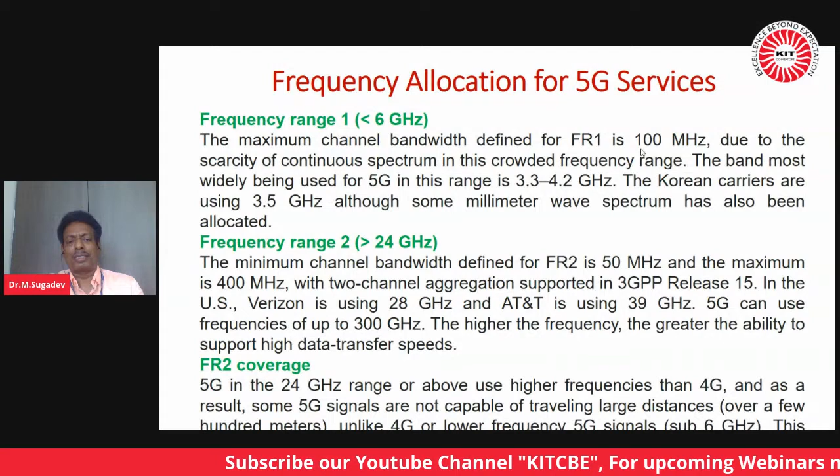And the electromagnetic tool we are going to see today can be used to simulate up to 300 gigahertz, even beyond that it would support. And if you are satisfied with the simulation results, you can go ahead with fabrication as well. Okay. So I have taken microstrip antennas because the sub 6 gigahertz band, some modem applications also fall in the 3.5 gigahertz band. So I'll take that frequency and show you how to design and analyze a microstrip antenna here.

So since mostly we use microwave frequencies for millimeter wave communication, that is 5G communication, which type of antennas are good for 5G applications? Probably the microstrip antenna, because it is more compact, you can easily increase the gain, build arrays, and go ahead with phased arrays where you can do beamforming. That is, you can direct the radiated beam in a specific direction of interest. All this is possible very easily with the microstrip antenna structure.

For high power applications, of course, we can go for the parabolic dish antenna; radars use parabolic dishes and other things. But for compact and portable wireless devices, microstrip antennas are going to play their role in the coming years. Over the past 5 to 10 years, they have invaded almost all wireless devices, and they will definitely continue for another 3 to 5 years. The reason is it's a planar device. It's very convenient to fabricate on the PCB itself; you can simply etch a patch and fabricate your device.

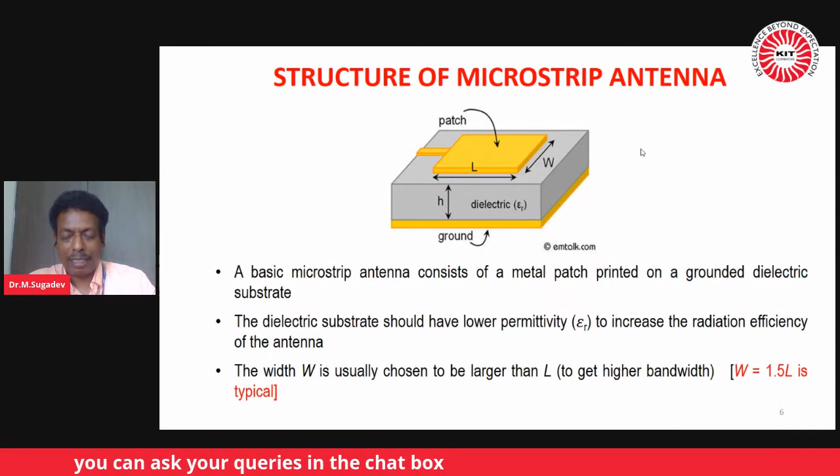And then we slightly extend the copper patch on the top to the edge of the structure so that you'll be able to connect the signal to it. Okay? And this is the fundamental structure of a microstrip antenna. So this structure closely resembles a microstrip transmission line, so it is called a microstrip antenna. Okay.

So what are the patches that we could use on the top conducting layer? As I said, it could be rectangular, square, circular, annular ring, elliptical, triangular, monopole, and so on. Any shape, whatever shape you decide to use, you can make it and try. Okay?

Right. And these are the feeding techniques. So you are making that structure, ground layer, a dielectric substrate, and above that you are making a copper patch. Then how do we connect signal to that? That's called the feeding technique: how to connect our signal that has to be radiated to the designed patch antenna.

But the impedance matching: the rectangular patch will have some impedance, and the source will have 50 ohms. Simply using a straight rectangular feed line of very small thickness will not provide an impedance match, and there could be losses. So the antenna may not perform well. So what people do is they'll try changing the position. The feed may not be at the center. It could be slightly above the center, or below the center. We can find out the exact matching point, and then we can fix it.

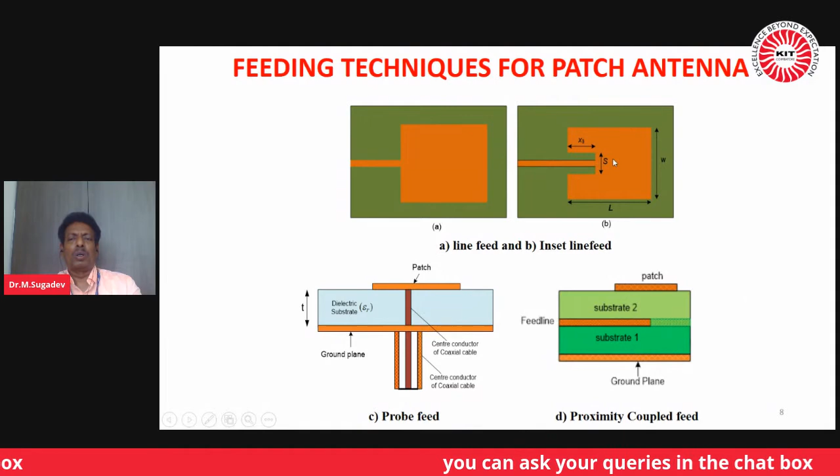Then the other one is proximity coupled, where the feed line is not directly connected to the patch. It is just in proximity, somewhere near to the patch. This structure requires two different substrates, one and two, to sandwich the feed line, so this is also very difficult to fabricate. This could minimize loss, and it could be preferred in some applications, but from a fabrication point of view it is very difficult, and it could increase the cost of your device. So you can go with the basic structure we have seen. Okay.

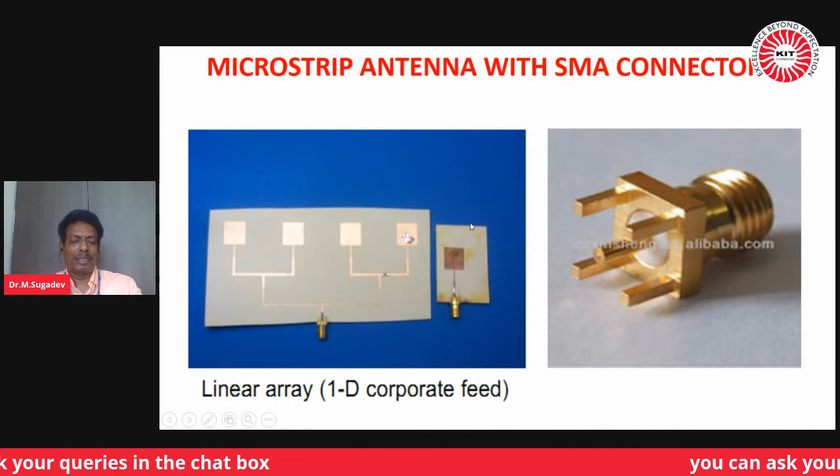And then you could get a microstrip array which will have a higher gain and more directivity. And this could be a required design for 5G mobile applications or the 5G base stations. It could be using an array of microstrip antennas.

So coming to the patch shapes. What I have shown previously used a standard rectangular or circular shape, and there is no limitation on the shape of the conducting patch you put on the top. That's the radiating layer, we used to say. You can try different shapes on the conducting layer, as well as the ground layer. It may not be a fully copper clad ground layer. You can introduce some defect in that. That means you can make some etching in the ground plane or on the top radiating plane, and you can have different shapes as you wish, and you can analyze.

If you could get better performance with your unique shape, that's well and good. So why do people go with these different shapes? To achieve higher gain, to achieve multi-band performance. Normally a rectangular antenna will work for a single frequency, whereas if you try some innovations in it, you can make a single antenna work for different frequencies, 2 frequencies, 3 frequencies, and you can minimize the losses. You can increase the gain, polarization you could change. All this is possible by simply playing around with the shape of the patch and its dimensions. It is quite easy when you become familiar with the electromagnetic tool. Any tool you can use.

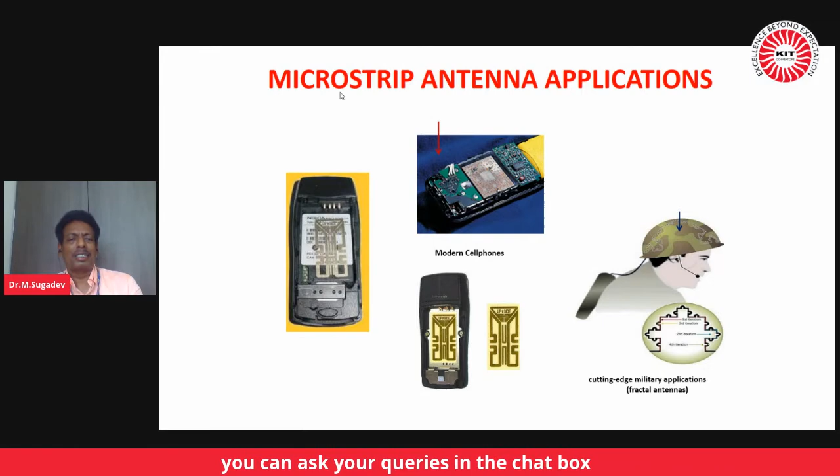This slide shows some of the applications. It is quite convenient for wearable applications. You can make it with some flexible substrate, then use it for wearable applications. All mobile phones will have a microstrip antenna, but they will have a unique shape that the company people would not reveal. All your Wi-Fi modems, Wi-Fi modules, RF modules, Bluetooth modules, in all of these you could see a small patch element that's acting as the antenna.

Okay. So what is the scope of microstrip antennas? It is very compact and very easy to design patches. Beam forming is possible. That means you'll be able to steer the beam in the required direction by employing phase shifters. And you can employ digital signal processing techniques for the phase shifters, and you can go ahead in building smart antennas. Different structures of patch shapes can be studied to achieve multi-band operation, optimized antenna performance, and so on. There's no limit in that.

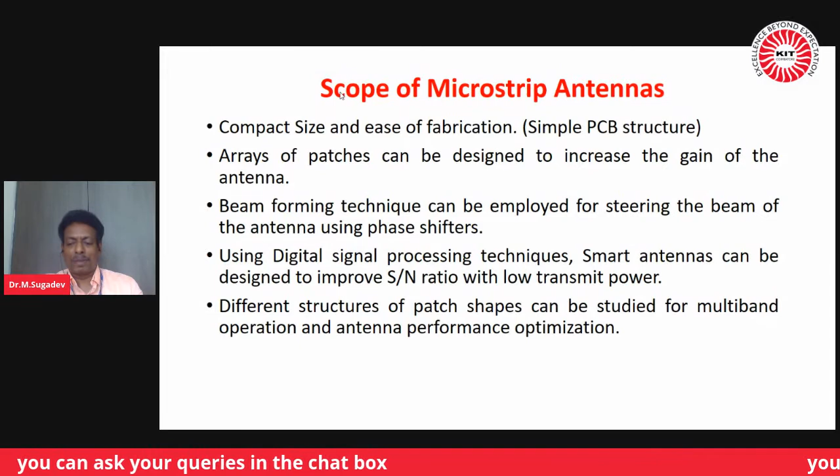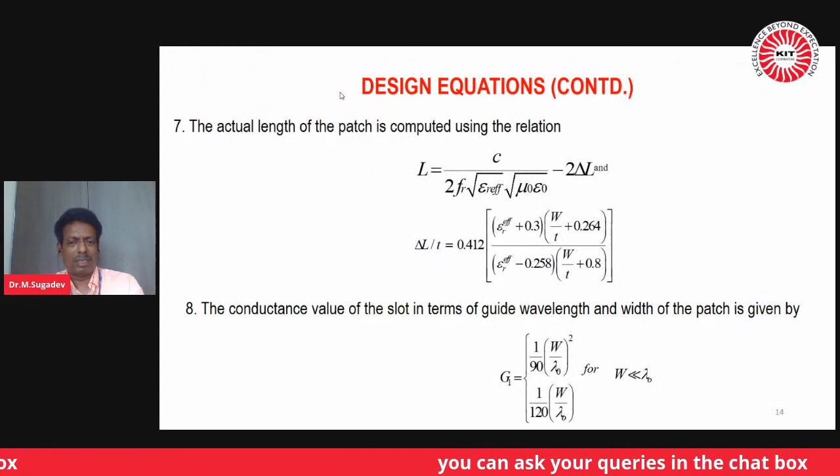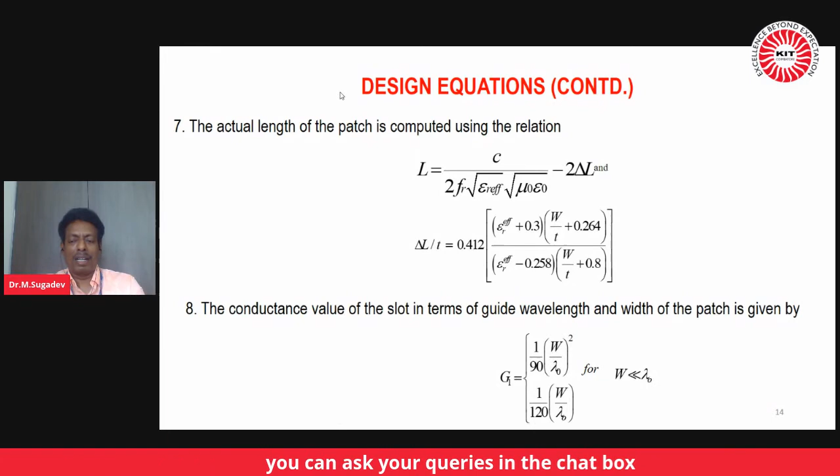I'll tell you how easily you can design an antenna with the online calculators that are available. Actually, I'm not going to use this complex equation. I'll simply use some online antenna calculators available for microstrip, and I got the dimension.

Okay, so now we'll proceed with the design of a 3.5 GHz patch. So whatever it is, 4G, 5G, 3G, as far as antenna design is concerned, we have to see only what is the frequency range for which it has to operate. Then we have to see what is the bandwidth required, because that decides the data rate of your transceivers actually.

So as far as the antenna engineer is concerned, we see what is the frequency range for which they need the application, what's the limitation, the dimension, what should be the maximum size within which we should design the antenna, and then how much power we are going to transmit. Generally for low power, microstrip is well and good till 1 watt. There's no problem with microstrip patch antennas actually.

And then the gain, how much gain is required, type of radiation pattern. This is what we are concerned with, and we need not bother about what is the technology, 5G or 4G, whatever it is. So we'll consider a microstrip antenna that has to work at 3.5 GHz, and let us see how to design and analyze that antenna.

Okay. So once again, I'm showing the structure of the microstrip antenna because this is what we are going to design. And what difference you see here, instead of that inset feed, let us try using a quarter wave transformer. Just a stretch of microstrip line can act as a quarter wave transformer, and this could provide impedance matching in the antenna actually. Other than that, it remains the same.

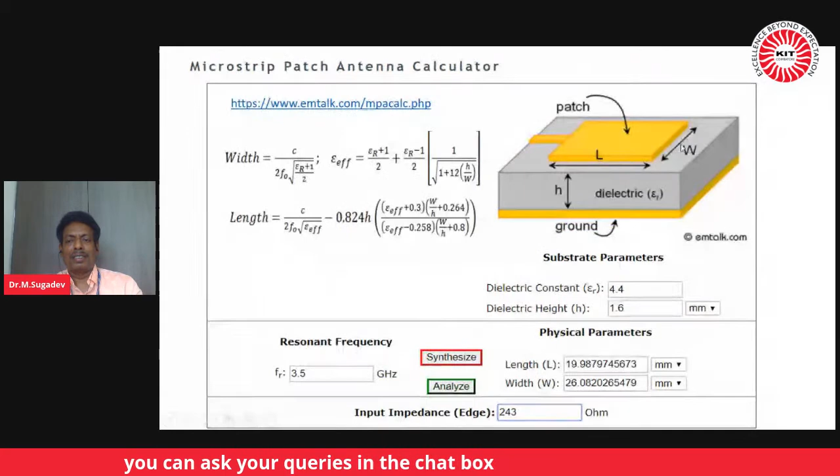And length of the patch we calculated for 3.5 gigahertz. Width, you got it. Then length of the substrate, this we have obtained by adding lambda by 4 on the right side, left side, and top of the patch. So we got the substrate length as well as substrate width, right? I hope it's clear. The substrate length is obtained by adding lambda by 4 onto the length of the patch on top as well as the bottom. That's what we have done. And similarly, width is obtained by adding lambda by 4 to the right and left.

So we got this. It's fairly around 6 centimeters. Your antenna size along with the substrate is around 6.8 centimeters. Feed line width, we have used this microstrip line calculator, and we got around 2.98 mm to get an impedance of 50 ohms. And then feed line length, I have used lambda by 4, but to be more precise, it could vary slightly. But to make it simple, I have simply taken a length of lambda by 4, 21.42 mm.

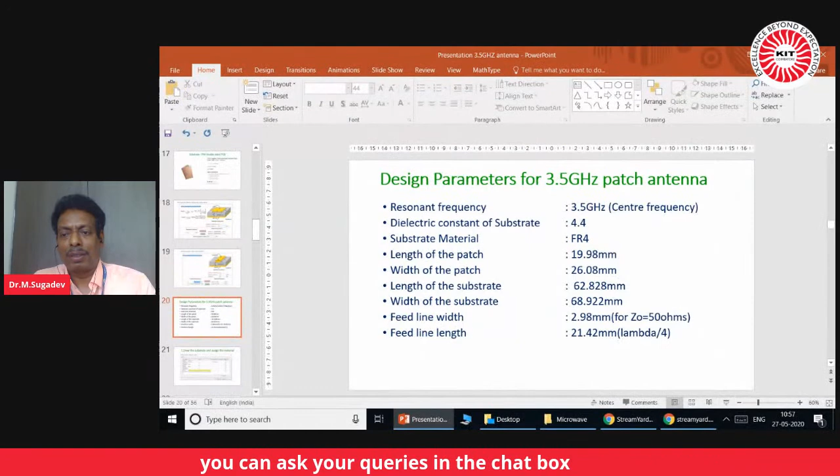Right. Now, before introducing the software, I just want to make sure, any questions if you have, you can please ask. Before going to the software, if you have any doubt, you can ask. Okay, may I proceed? Okay.

Where we got this L and W equation: the standard book for microstrip antenna design is Balanis, Antenna Theory: Analysis and Design. In that, one chapter is dedicated to microstrip antennas. You could find the complete design equations for a rectangular patch and a circular patch. We just take the equations published in that book. Those are standard equations which you can rely upon. Even all the online tools available are based on those equations. They have put the equations for two models, transmission line model and another model. This one is based on the transmission line model, which is more popular and works accurately.

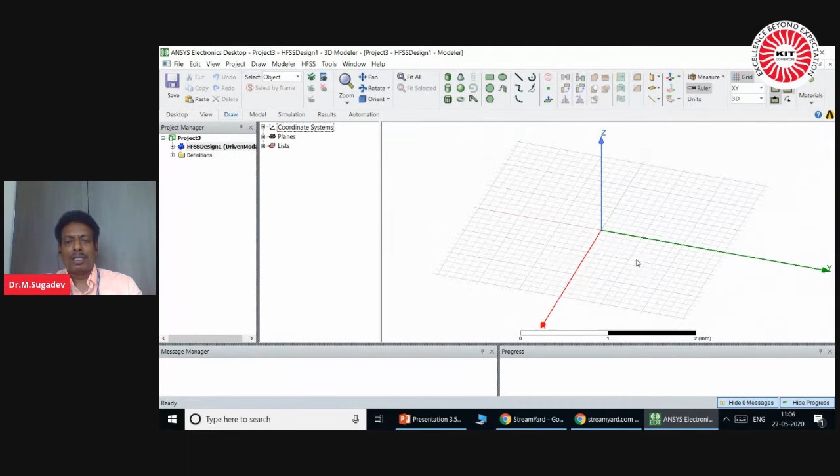So I keep the origin at 0, 0, 0. So with respect to that, I'm going to draw. So the X is the red line and Y is the green line and Z is the height actually. So I'm going to start from 0, 0, 0, and first I'm drawing the substrate. As you know, the length would be 60. You can check here. The length would be 62 and width would be 68. Okay. So it is a box actually. So it has some finite thickness. So we have to select a box, draw a box.

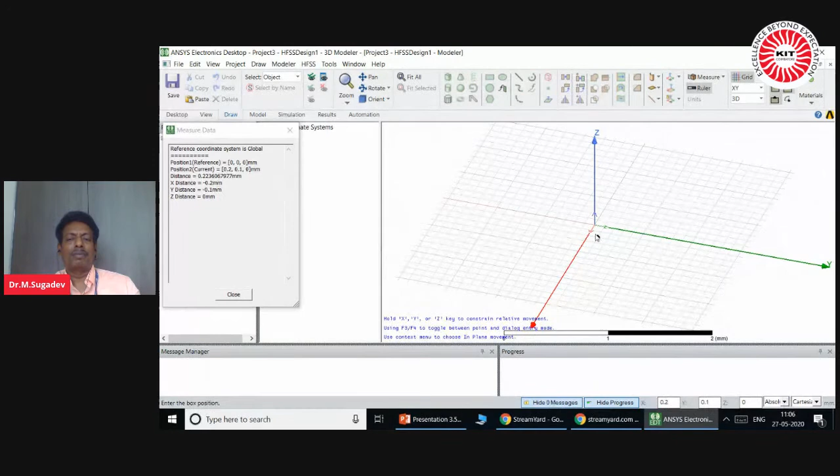I'm going to draw a box. You need not draw at the right position. You draw somewhere in the workspace. Then you can enter the dimension for that box, and then it will go and fit into that exact position actually. So I'm not drawing here with respect to the coordinate. Just randomly I draw a box here. Okay. So when you create a box in the workspace, you could see the object is created in this model window actually. And initially it is vacuum material. We have to change it.

So double click on that. You can right click, properties. You can edit the material, or the other way, you simply click on the box. You give some name actually. So first we are going to create the substrate, right? It's not vacuum. I have to select the material. So I'm just editing it to select the material. You have a list of materials, various materials that could be used. Rogers RT Duroid, what I told, is the Rogers material. Then you also have Arlon in this.

Any material you can try out, but when you fabricate, what is available to you, you have to check. So I simply type FR4 and you could see FR4 epoxy being selected. If you want to know the property, once again, I'll just right click on this, edit. I'll show the property. You could see the property in this. FR4 epoxy, 4.4 relative permittivity, and that's what we are using in our design equations actually.

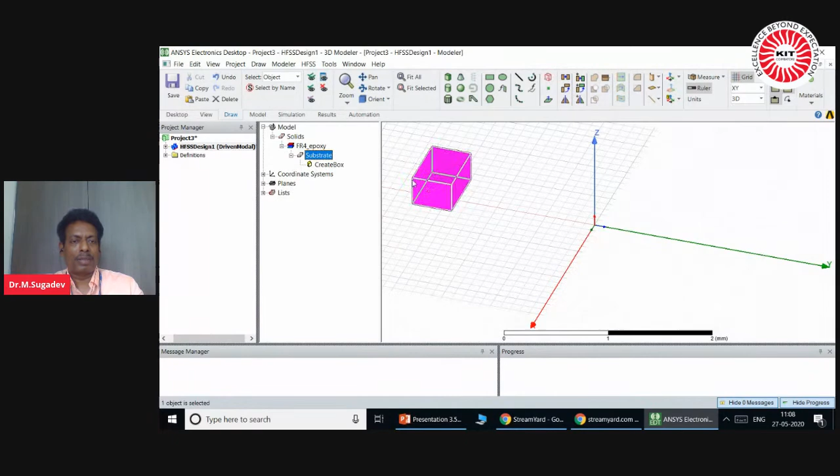Okay, so we have selected it, and if you want to use some color, you can choose. This will help to visualize the object actually. Substrate can be any color you want. So you double click on this box one, what you have created, and assign a name and choose a material. And then if you want, you can put some color over it. And then you click okay. Now you could see that object changed to substrate actually. Still the dimension we have not entered. Then click on the create box to enter the dimension.

As I said, we are going to start at 0, 0, 0 position. At the origin, I am starting. So I want to keep the surface at z equal to 0. So the x size is, I will just look into my worksheet. So substrate position is 0, 0, 0. X size is 68 point. This is what we have calculated. This is the width and length plus lambda by 2, lambda by 4 we have added, right? I hope that's clear.

Then the y dimension: x is 68 and y is 62. Just enter this value, 62.828. Look at this. And z size is the thickness. I'll give minus 1.6. We need a thickness of 1.6. Why I give minus 1.6 is that I want to keep the radiating surface at z equal to 0, right? So I'm just drawing the substrate down in the minus z axis. So the substrate thickness will go down. The top of the substrate will be at z equal to 0, and the bottom of the substrate will be at z equal to minus 1.6. That's the reason I have done that.

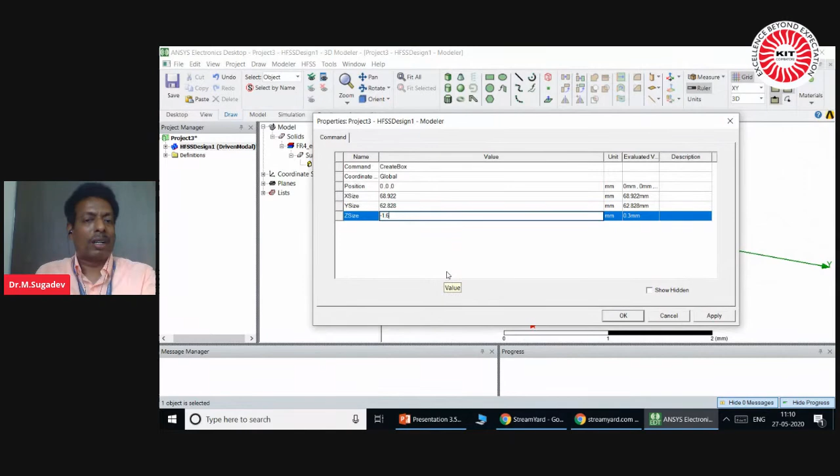And we got this value of width and length of the substrate by adding lambda by 4 on the left and right side of the patch and top and bottom of that. That gives the substrate length and width.

Okay. So I apply this, and you could see once you enter the dimension in this create box under the substrate object, it goes to its position according to the coordinate. It goes and fits itself. So you can zoom it, so now you have created your substrate. Okay, right. So the first job is over.

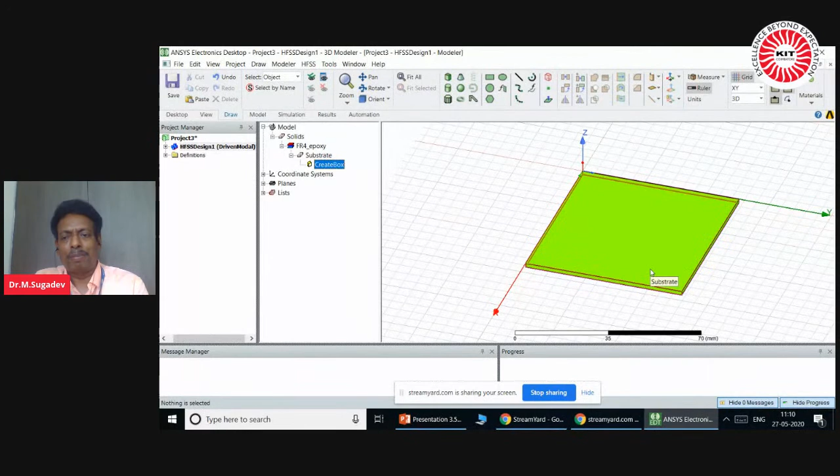We did the substrate, and then let us draw the ground plane. So the PCB, all the microstrip structures will have a copper ground at the bottom. So we'll make a copper patch at the bottom. This is not the radiating one; it's a ground layer, copper ground layer.

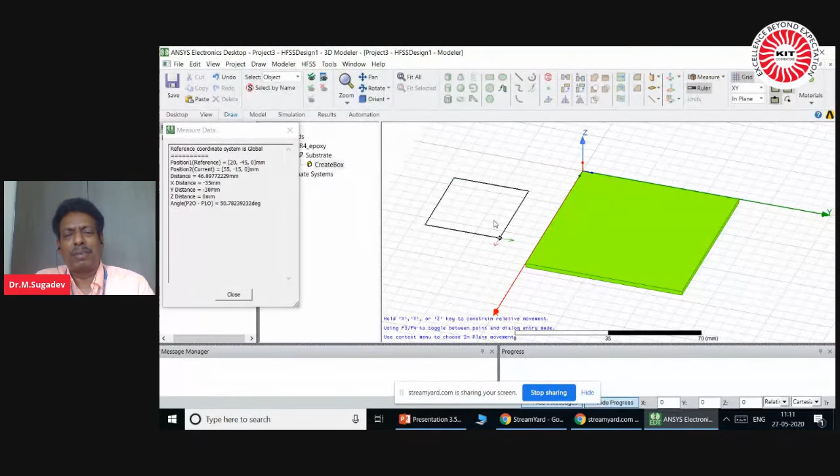So for this, I'm not choosing box. I'm choosing a sheet because the copper thickness will be negligible. That's the reason why I have chosen a sheet. So it doesn't have any thickness. An infinitesimally small layer of copper at the bottom that's going to act as the ground layer. So I have chosen a rectangle for the ground layer, right?

Okay, once you draw a rectangle, somewhere you can draw in the workspace. Again, you could see an object named sheet here and rectangle 1 because its shape is rectangle. So you can double click on the rectangle here and then give the name. It is ground. If you assign a proper name, it will avoid ambiguity and confusion.

So the ground layer is a copper layer. This is not material. I'm just assigning some color just for my observation. In the structure, if you assign different colors, you'll be able to visualize it. This is not the material. So we have given the name by double clicking on the rectangle, ground, and color I have chosen. If you want to change the transparency also, you can change it. Give okay.

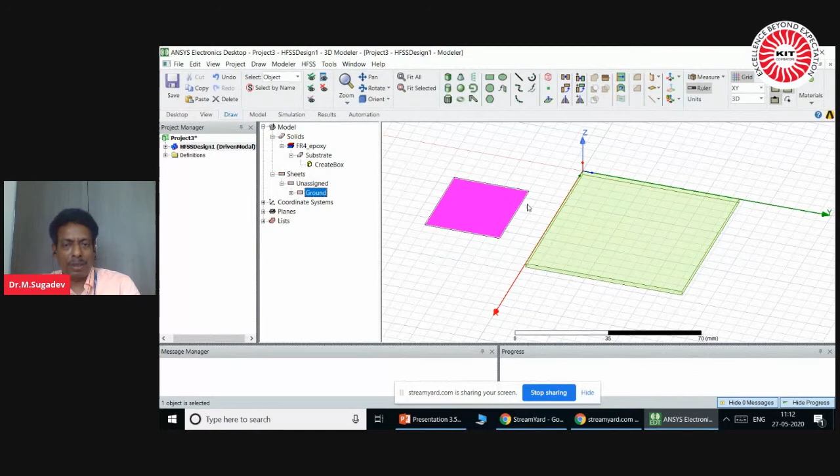So now we have to give the dimension. So what's the dimension of the ground sheet? The ground sheet has 0 thickness, z equal to 0. So its dimension would be the same as your substrate. Only the position is different. You have to draw it at the bottom. The origin is different. So I expand this ground. I click on create rectangle.

Now I have to enter the position. So x position is 0, y position is 0, but z equal to minus 1.6. Position is 0, comma, 0, comma, minus 1.6. So I want the ground plane to be at the bottom of the substrate, right? The bottom of the substrate is at z equal to minus 1.6. That's the reason why I'm drawing the ground plane right from z equal to minus 1.6, so it will stick to the bottom of the substrate.

And x size is same as your substrate, right? It should stick to the substrate. So x size is same as that, and y size is also same as the substrate. So it is 62.828. Okay. So now we have finished drawing the ground layer also.

You can see it here, but you click on this ground, and there are some tools to rotate. You click on the tool to rotate it, and you can see at the bottom you have this ground plane. Let us see what color we have chosen. We have given this color. It's okay, no problem. If you click on this create rectangle, then you could see that.

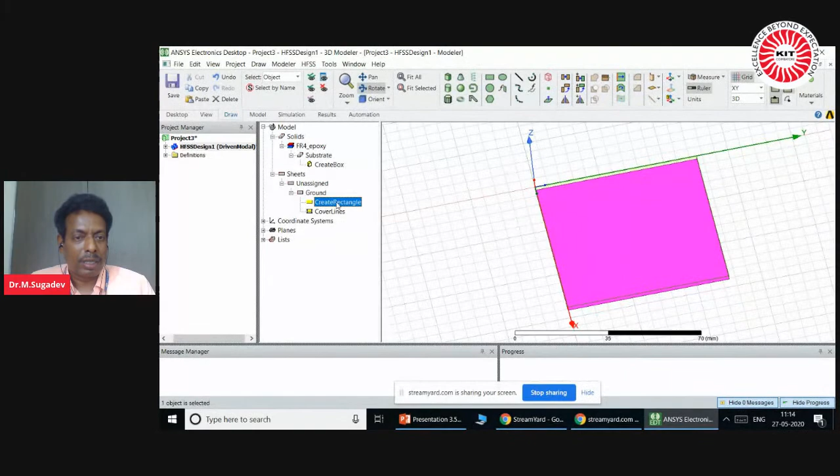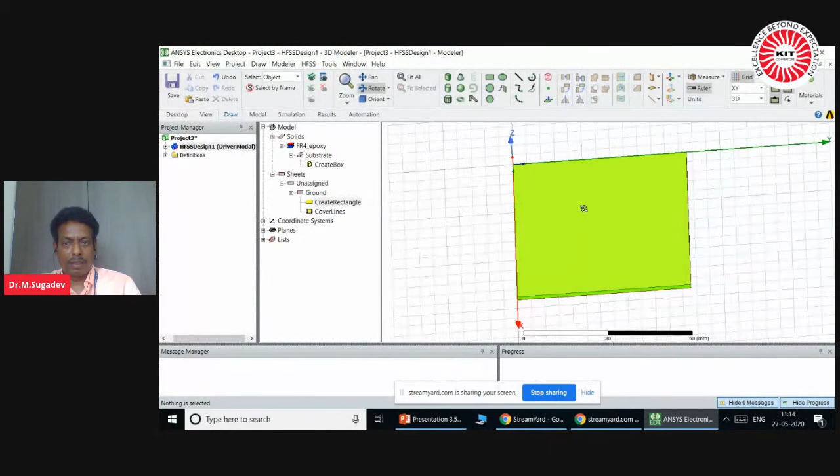So at the bottom of the substrate, we have created a layer of copper. That's a sheet, a rectangular sheet, which will act as the ground plane. Okay, is that clear? Right. It is rectangular only; it's just the view. You can rotate it if you use this tool. Pan tool is used for moving this, and with your mouse you can zoom in or zoom out.

Okay. Then what's next? Now we have to draw the rectangular patch, right? So in the PPT, you could see the steps. We are first drawing the substrate and assigning the material, and the next step is entering the dimension. We got the substrate, and then after that, we draw the copper patch behind this. So we choose rectangle, enter the dimension.

Okay, after drawing this, when you draw a copper layer, you should assign the material. For the substrate you have assigned a dielectric material with 4.4 permittivity, but for this ground layer, you should assign what material it is.

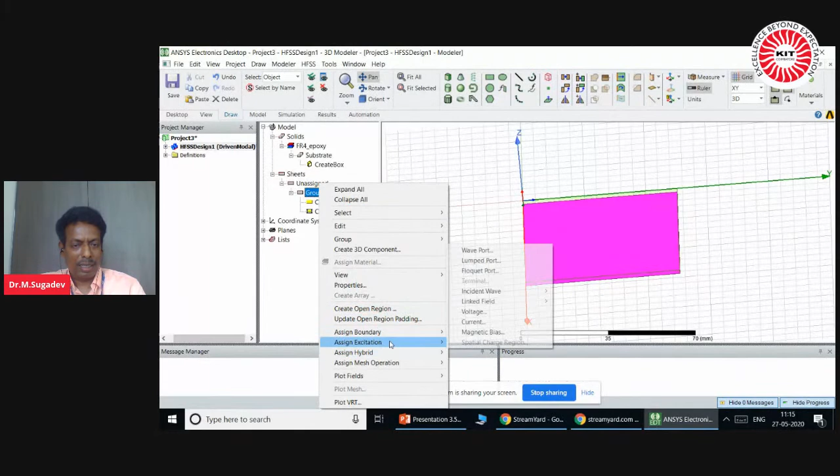For a sheet, you should tell. So how to assign that? You click on ground, right click on it, then I'm assigning what material it is. You could see assign boundary. So I'll simply tell it is perfect. It's a perfect electrical conductor. I'm not telling it is copper or aluminum or gold, whatever it is. Simply I say it is a perfect electric conductor. That's what you can do for all conducting layers.

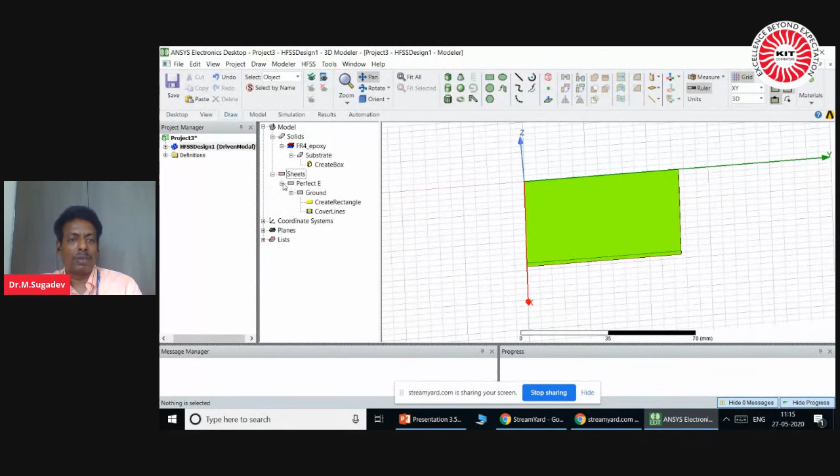So the ground layer is a conducting layer, so you can assign perfect E. Once you assign that, you could see we have assigned that material as a perfect E. Then the next one is the patch. The third one is drawing the patch. You could see here, we got the dimension of this, and the position. As I said, the substrate should have lambda by 4 gap on all the sides. In the feed direction it could be greater than that, but right now I have chosen lambda by 4 surrounding all this, right?

So with that, I should find out the position, where to start drawing this rectangular patch. It should be lambda by 4 away from this x axis and lambda by 4 away from this y axis. That will be the starting point of this patch. Then from that point, you can give the length and width and create this structure. So there's a little bit of calculation you should know. You know the origin, and you know the gap from the edge, which should be lambda by 4. I said lambda by 4 is 21.42. So from here, x is 21.42, y is 21.42.

That's the starting point of the patch, and z equal to 0 because the top layer of the substrate lies on z equal to 0. So that's our position. We start from here, and the x length would be the width, and the y direction would be the length. We have to enter that, and that will give us our rectangular patch. So I'll go to the software now. The top layer is also a copper layer, so I'll again use a sheet here, a rectangle.

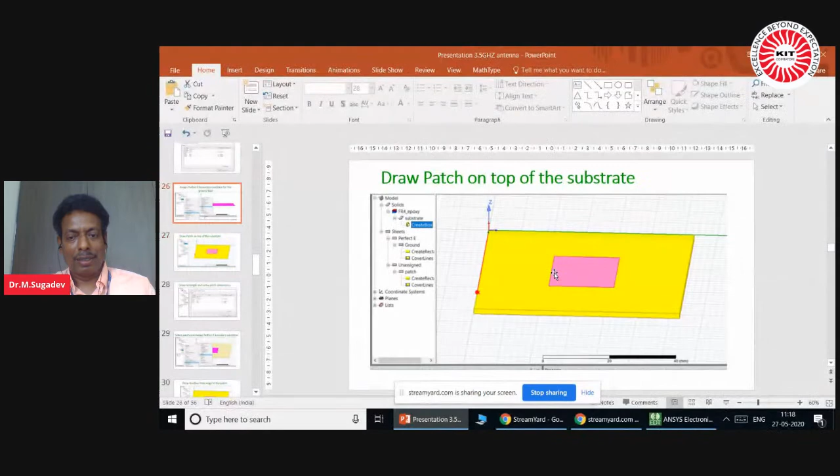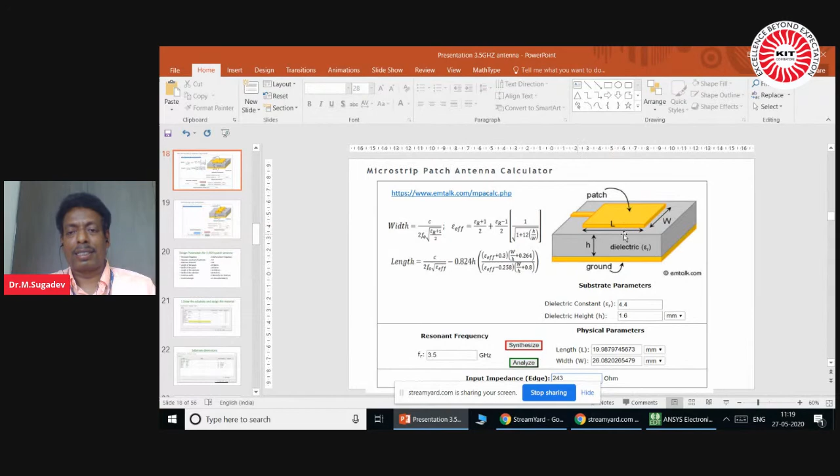Then x size. Now what is x? You can give the dimension of the patch. You could once again look at this. The length of the patch, according to our coordinate, L is the y dimension and width is the x dimension, because we are following a unique xyz coordinate. So now I will go here and enter this value. This value is already calculated.

For the patch, x dimension is 26.082 and L is 19.988. W will always be slightly greater than L. In fact, W by L should be less than 2. We should see that. So this is the length and width we calculated using that emtalk website Microstrip patch dimension calculator. And Y size, we have given that.

Sorry, I had to give them separately. So X is 26.082 and Y is 19.988. The more precisely you give the values, the more resemblance there will be between designed and simulated values. So I apply this value. Now you could see the patch sitting in its respective location with respect to that coordinate, right? So we have finished the patch. Now I'll go with the rectangular feed line. Now we have to draw the feed line.

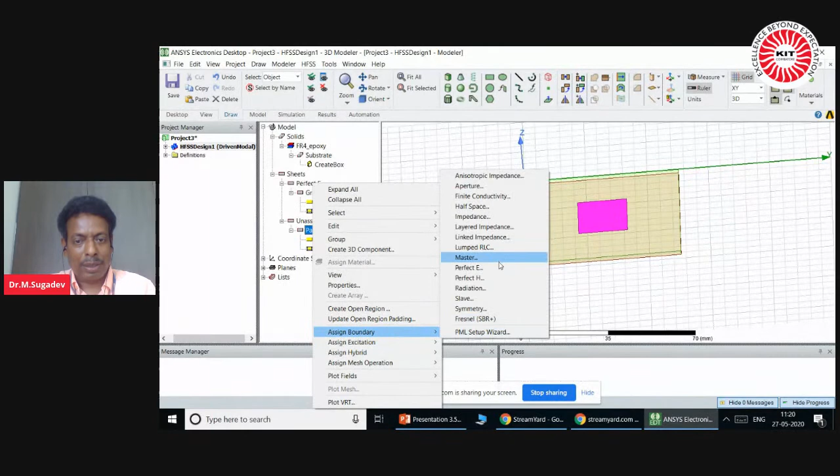One more thing, for the patch also we have to assign that boundary. It is also a copper layer, right? So assign boundary, you can give perfect E. So it becomes perfect E now. It's a conductor, we are telling it is conductor. Then draw the feed line. Now we have to draw the feed line. I'll show this. Okay, another feed line is a rectangle, right?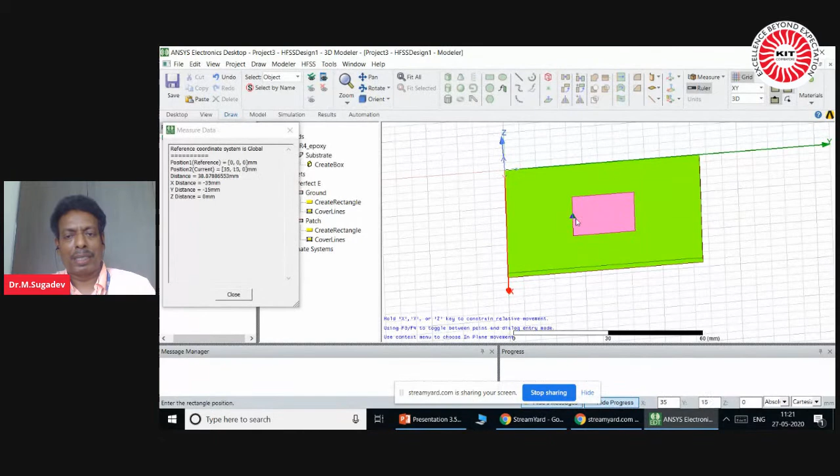As I told, I'm going to use that quarter wave transformer, right? So two different lines will be drawn here. One will be slightly wider and the other line will be shorter because that will give you a better performance. So I'll draw first feed line 1. We have calculated that feed line 1 is going to be at the edge of this. So its width, we got it as 2.98, right? Okay, that we are going to draw. Unassigned rectangle. So this is feed line 1.

So I'll make the same patch color so that it's the same copper patch. I've drawn this. Now we have to enter the dimension for this feed line 1. So position is, I'm starting from the edge. I already calculated 32.93, comma 0, comma 0. Okay, so this is the starting point of the feed line, and its width is 2.98, which we calculated using that microstrip line calculator, and y size is the length.

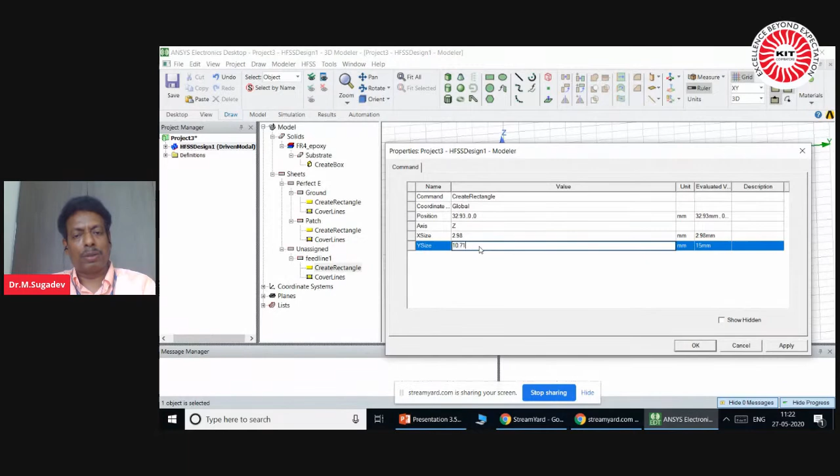I'm not drawing a single rectangular feed for the length 21.42. You can try it actually. You can first try with a single strip, you can put y size equal to 21.42. So yes, single strip will go and join with the patch and you can see what's the result. Time is running short, so I'll go with that quarter wave design directly. So 10.71 I've drawn, apply. Okay. So I have made one feed here, part of this.

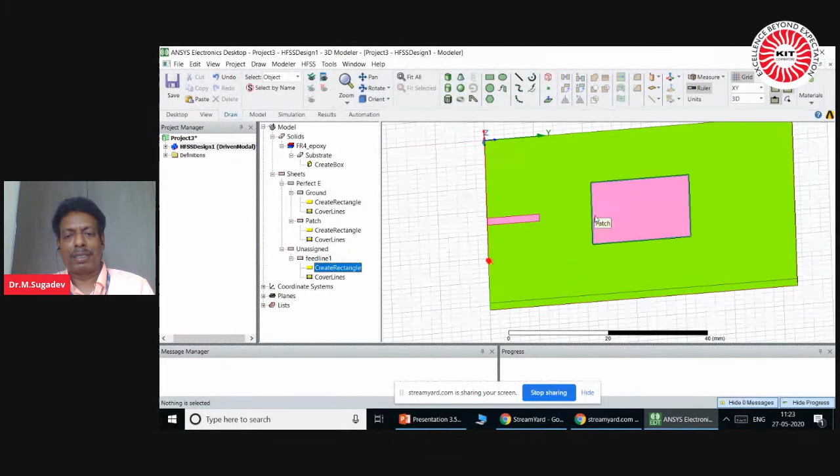So the next line, I'm going to make it narrower because it's going to be a quarter wavelength transformer. It's a thinner line, that's all. Instead of having uniform width from the edge to the patch, I'm going to use a smaller one that provides better results. I'll show you in the results actually. Okay, this is joined now. And then another feed line we have to draw. So again, we take a rectangular thing.

Feed line 1 we have done, it is not assigned, so you can go to assign boundary. This is important because we are telling what material it is. It's a conductor, we should tell, then only the software can analyze exactly. Then another rectangle we have drawn. Patch is over, ground is over, feed line 1 is over. I'll make this as feed line 2. So I'll use the same color because all are copper patches. Apply, okay. Then we should give the dimension for this.

So the remaining length we are drawing. So starting point is now moved, 33.716. It's a position actually, 21.42, 0. This is the starting point, and the x dimension is, see now its thickness is less. The previous one is 2.98, and this one I'm reducing the thickness for impedance matching actually. And the y size is minus 10.71. So why y size minus, I'll tell.

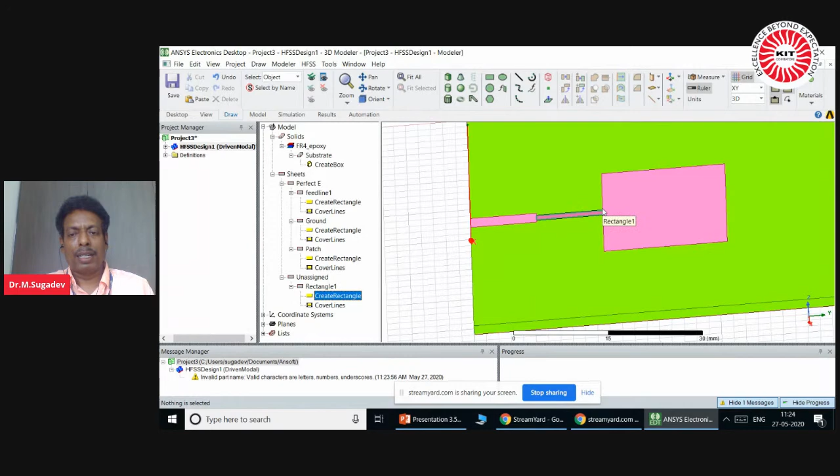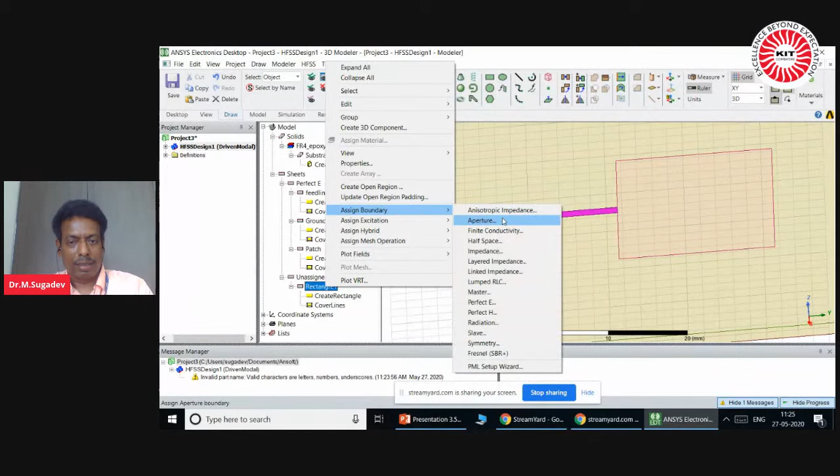Okay. So the starting position is here at the meeting point of this feed line 2 and the patch, and then I give the x dimension and then this y dimension. So since we are drawing in the reverse direction, the y is negative. If you give y as positive, it will go this side, right? So that's the reason why we made y as minus 10.71, so that that line will come back in the reverse direction. So now we have made the feed, and again you assign this rectangle as a perfect E material. So all have been declared as copper. That's a perfect conducting material.

The next thing is we have drawn 3 different objects, right? Even though they are touching one another as per the dimension, they are physically independent now according to the software tool. So we have to merge them. That's called uniting. We have to unite all the 3 segments, and then only the software will consider the 3 objects as a single entity. We have to join the feed line 1, feed line 2.

I have not named it, sorry. I'll once again make it feed line 2. If you name it, actually you can avoid ambiguity. You can easily go to that object which you want to edit, and I think it is not accepting any space in the name, so you should see that. Okay, so easily you can go and edit that particular component if you give the right name actually.

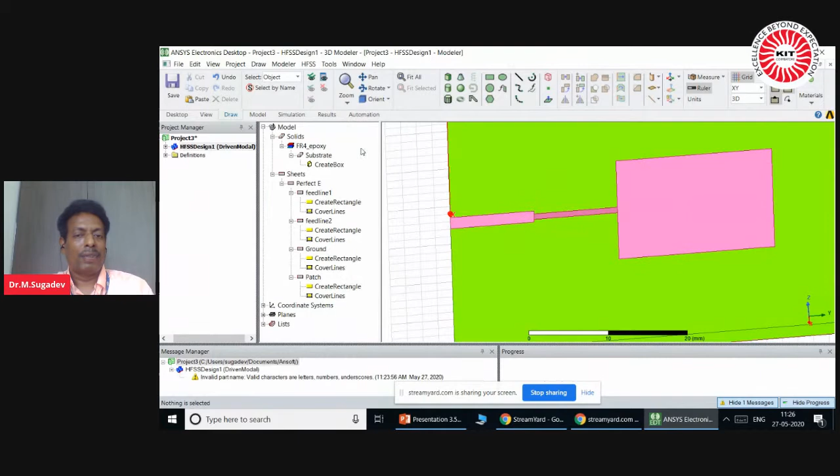So we have drawn it, and we have declared all of them perfectly, right? That the feed line 1, 2, ground, patch, all are copper patches. Then what do you do? Okay. As I said, still they are independent objects as per the software, so you have to merge them together. For that, they have given the option. You select what objects you convert to a single object, feed line 1, 2, and the patch, right? It's a single layer, we just etched it out. So we want to combine these 3, right?

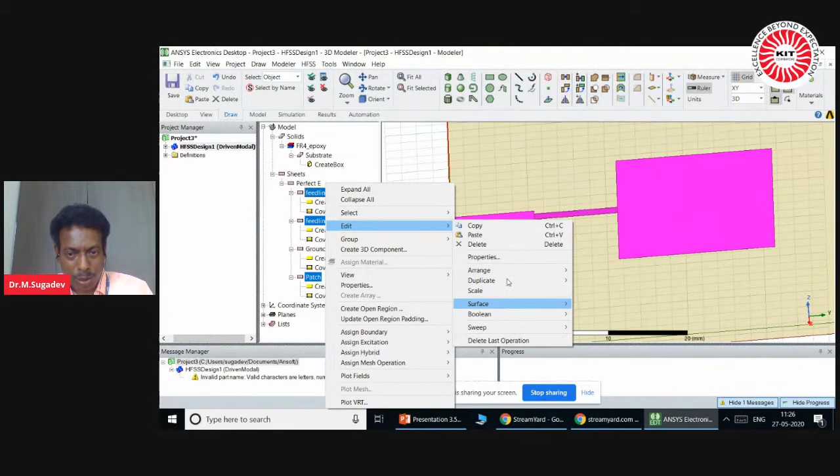So select the elements which you want to join, then right click and you select edit, and then here you could find the boolean. You can add or subtract. If you want to make a slot, we use the subtract option actually. Now we want to join, so select this unite option. So once you do this, you could see there are no boundary lines in this object. Earlier you could see small boundary lines, but now there is no line. It's a single object now. Okay, right.

Okay, our design is over. So we have created the microstrip structure in the software tool, right? It won't be difficult. If you just do 1 or 2 designs, it will become very convenient. Okay, next, you see after uniting, you could see all in this. Only if you expand the unite option, you could see. So all this have been combined. That's what it means actually. Whatever changes we make in the geometry, that reflects in this object window actually.

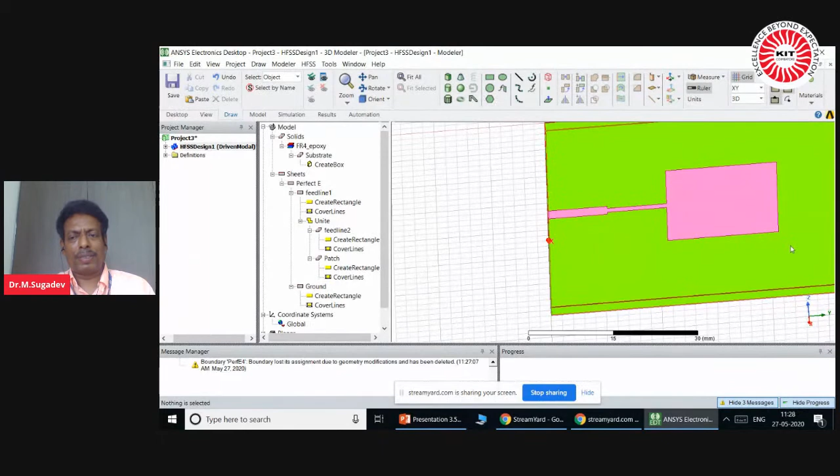Okay, right. The next thing we have to do is port. Someone asked what kind of port you have to use. So as far as the geometry, we have created our design as per the dimensions. It's over. But from the software point of view, we need to declare the port actually. I'll just open this and rotate. I'll change the direction here. Port is nothing but I want to tell the software in which cross-sectional area the software is going to excite our structure. You are going to connect the source, right? So the software should be told in which cross-sectional area the source will be excited into the structure. That is done by defining the port actually.

So it is not a part of the geometry. It is required only for the software tool. As for the geometry, the antenna is over. We have done it, but it is required only for the software actually. So that determines the area in which the field will be applied, the excitation will be applied into the structure, and then it will analyze the radiation pattern and other parameters as well. Okay, so to do this, we just have to tell the area. We have to draw a rectangle. That's a cross-sectional area in which the feed signal will be applied into the structure. So simply we are going to draw a rectangular sheet, nothing else.

But this time we have to draw it covering from the ground to top. We have to draw just next to that structure actually. So since we are going to draw a rectangular sheet, I change to the ZX plane actually, right? It's going to be vertical, right? Now this sheet is flat. The patch and all is flat in the XY plane, and this rectangle is going to lie on the edge of the substrate, right? So its axis is different, right? So I change this to ZX axis, right? Now you can draw this.

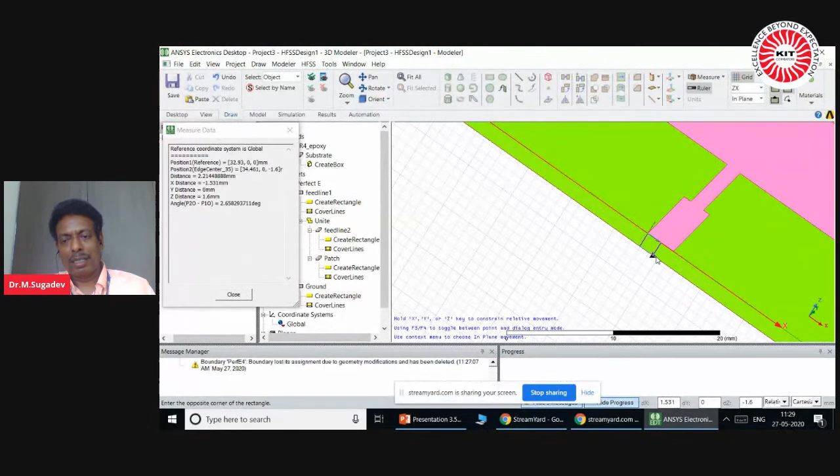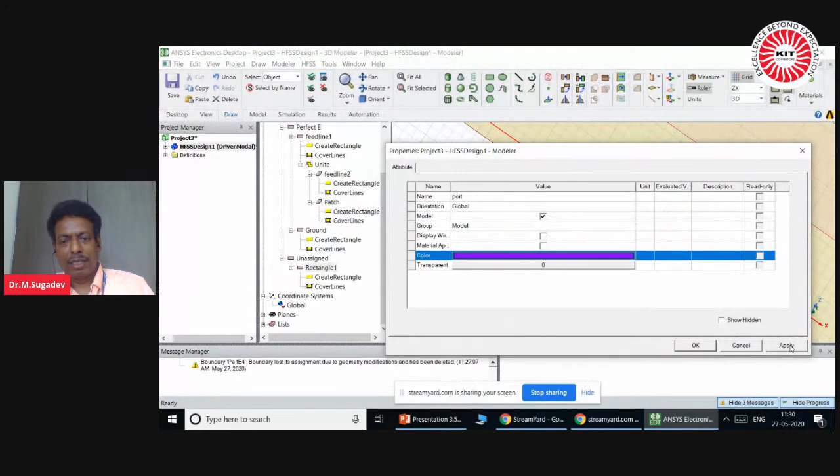As you look at it, I'm just drawing a simple rectangle actually. Anywhere you could draw, no problem. I'll give the right dimension. Now you created another, I think this is port actually. So it is not a part of the structure, it's just for the software. I just name it port and I give some other color. Okay, then apply. This is just a rectangle we have drawn, and then we've named it as port, and let us give the dimension. So it should exactly lie between the top and bottom of the substrate, right? So we have to give the right dimension. So the position of the port is X, draw rectangle.

Okay, so the port position is X is 32.93 and 0, 0. We start at the top edge of that feed line. We start here actually. Here we are starting. This is a position I'm entering here. Sorry, x is 32.93, y is 0, and z is also 0. It is on that plane.

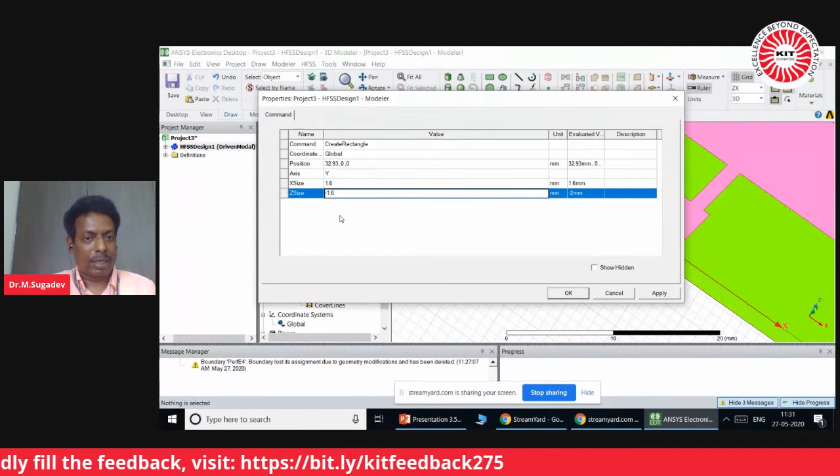And then y axis we are drawing. We know the substrate height is 1.6, so you can straight away. Sorry, z is the height. It is minus 1.6. It should draw in the reverse direction. And the x size is the width of your feed line. It is 2.98. So I'm giving the dimension for this.

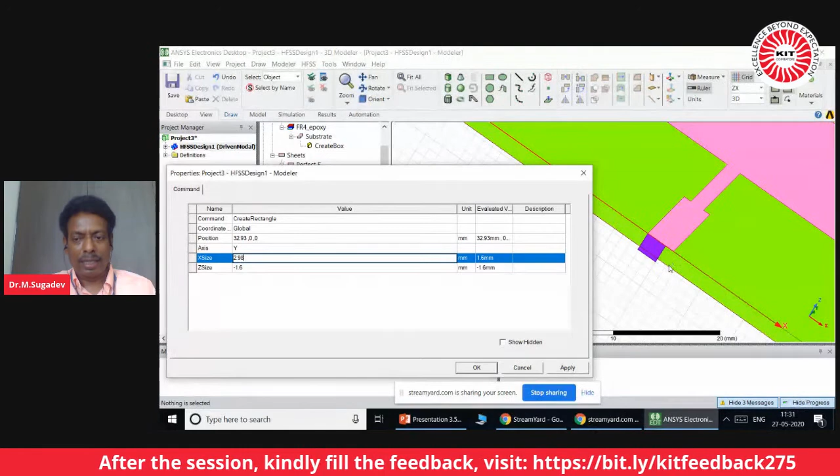This is the starting point position, and x size is this width. This width is 2.98, the feed line width, and this height is 1.6, right? So minus 1.6, from here it is going down. We got the structure. Now it exactly fits here. You can zoom and check if there is any air gap between this port and your structure. You'll get an error. It should touch that. It should not go inside the patch dimension. It should just lie in the boundary exactly, right?

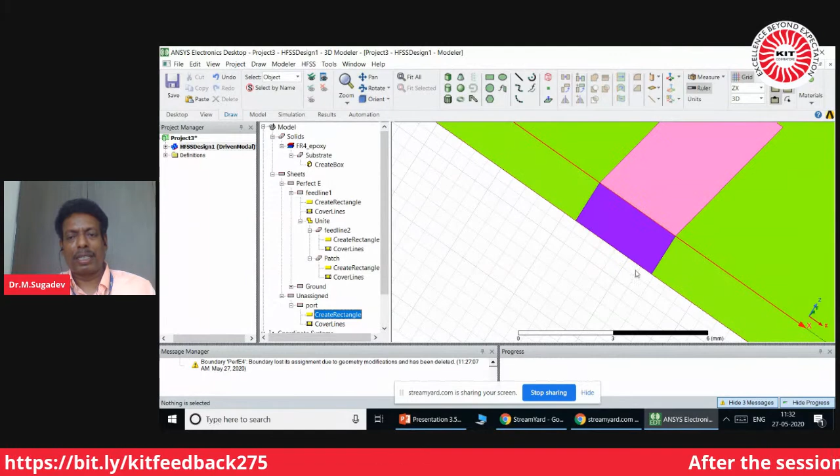Okay. So now this is the area where the feed signal will be applied. It can be larger than this also, no problem. You can keep it larger than your structure. You will get a better performance. But for professional analysis, we'll keep the exact dimension at the edge. Okay, that is done. Now we have to tell what it is. This is not a copper conducting layer, this is a port. So we have to declare this rectangle is a port. So I'll select this port and right click.

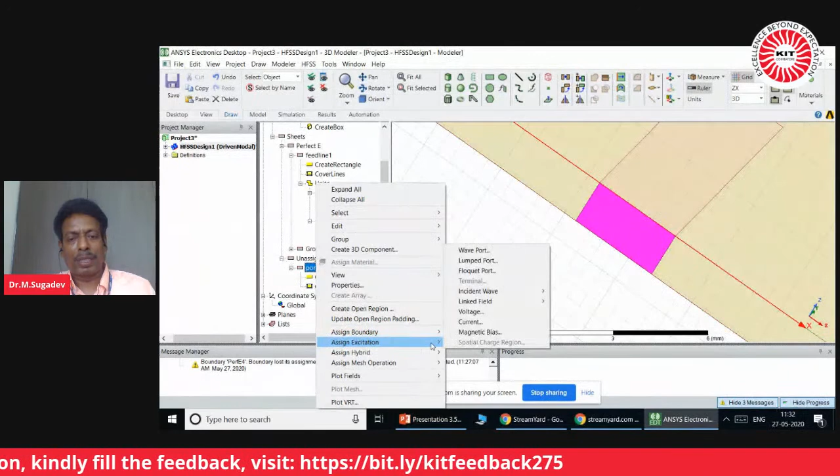And now you could see I'm not selecting boundary, I'm selecting excitation because it is the port, the area in which the signal will be applied. Somebody asked why lumped and wave port; lumped port is normally used for microstrip design. The input impedance, I'm telling 50. It means the source excitation impedance would be 50 ohms. Then it will ask for the integration line. The integration line is nothing but the direction. It will be none here. You click on that, select new line, and you'll get an option to draw a line.

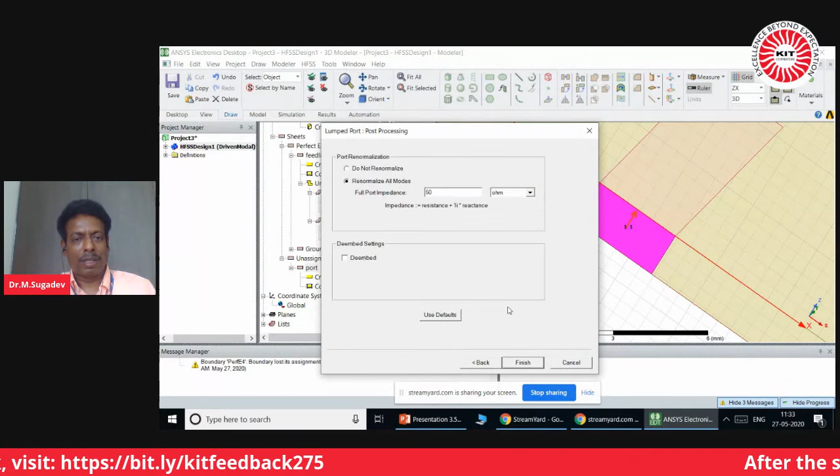This line tells the direction of the electric field. That's all. The source is going to apply energy into that, so what should be the direction? The electric field should always go from the bottom to the top. So we are defining the direction of the electric field of the source excitation by drawing this integration line. Once you draw this, port impedance becomes 50. Here the impedance is 50, no problem. This feed line also around 75, 50, no problem. But the patch has a different impedance, so you'll get mismatch.

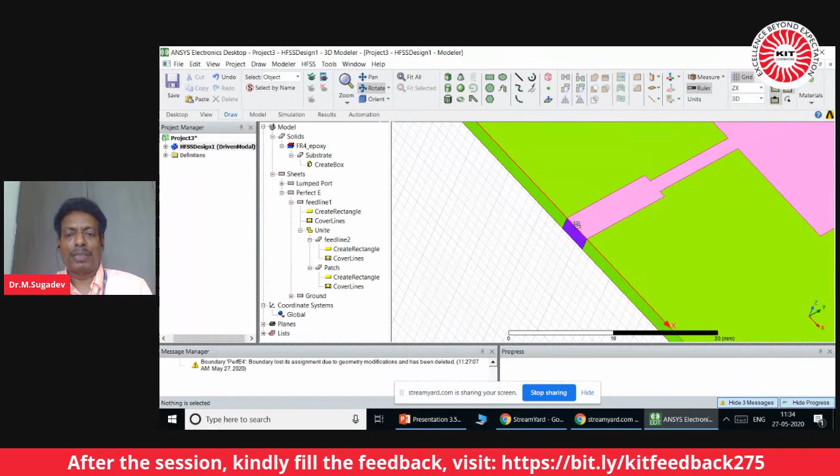That's the reason why we have reduced this dimension. This length is called a quarter wave. I have not exactly used a lambda by 4 length; I just want to demonstrate that concept. This will do the impedance matching between this 50 ohms and this 290 ohms patch. So all our job is done. We have designed the structure, created the port, and assigned the port. You should check whether the port is assigned, lumped port or wave port. Even wave port will work, but we generally keep a lumped port for this patch antenna.

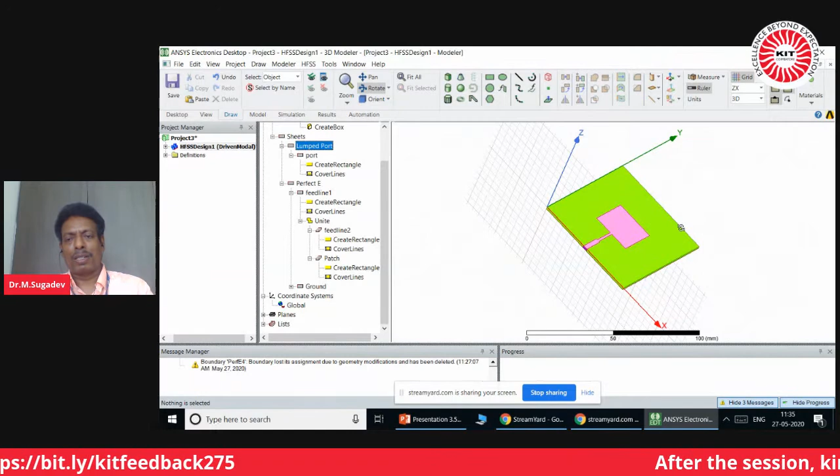Then one more small step. HFSS wants us to create an air box surrounding the structure. This structure should be kept inside an air box that covers the entire structure. In previous versions, we had to draw that, but now the software automatically creates it. Right?

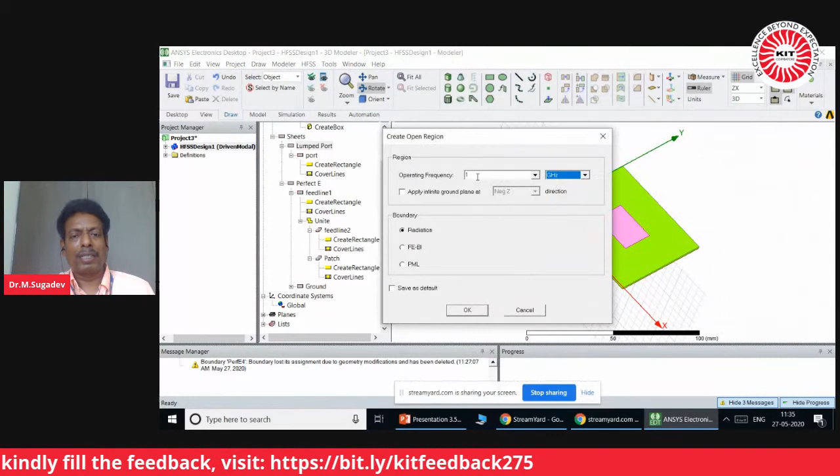What we have to do is simply go to HFSS, or you can simply right click here, and you could see this create open region, and it will create a box. Operating frequency, this is just the radiation boundary. So what is the boundary at which the software has to evaluate the radiation field values? That we are defining. And it's an air box surrounding the structure, nothing else.

I'll tell once again, you just right click on this window. You could see create open region, and then it will ask for the operating frequency. The center frequency of our design is 3.5 gigahertz, and boundary radiation you give, and then you okay. So automatically you'll get an air box. With this you will get a more accurate result. If it is not there, also you'll get results, but there could be some mismatch.

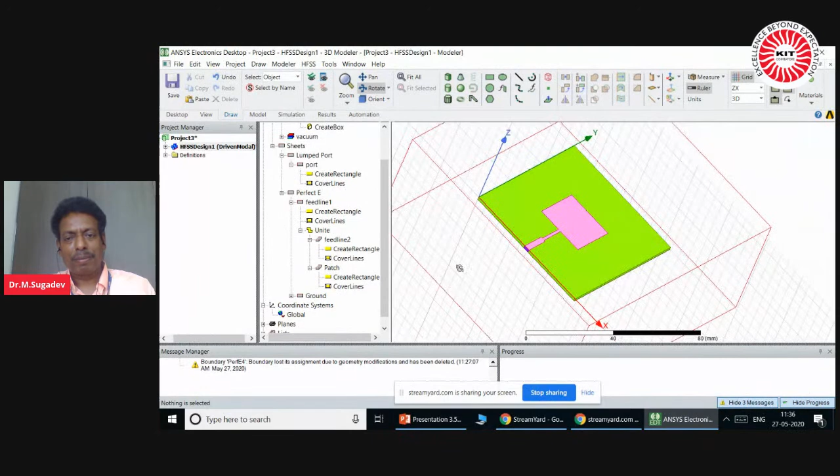So we have designed it. Our job is done, right? So now we can cross-check whether our design has any bugs or errors. We do compile and check for errors, right? So similarly, we can do here in this software, there is an option. Here you go to select HFSS and validation check. You click on that, it will show.

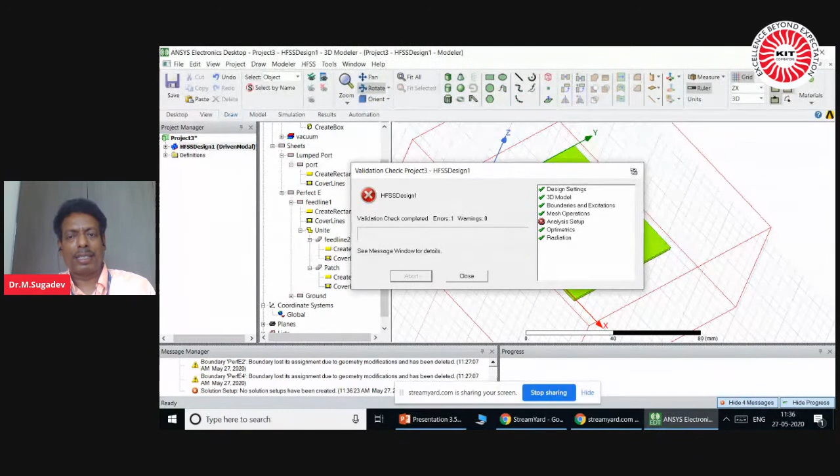So design settings is good. 3D model is right. Boundaries, excitations are clear. Optimetrics, radiation, all things are done correctly except analysis. So we have not yet set the analysis. What frequency it should analyze, what's the frequency range it should do, that we have to set. So once the design is done, you could see various things here.

To set that analysis, you come here in the project manager window. Once again, your design is done, that's over. You come to this analysis and just right click on this. You'll get add solution setup. So for what frequency the software should analyze, that's called solution setup. We can tell what center frequency, what's the range, all this we can give in this. Once again I repeat, analysis, right click on this, add solution setup, you'll get it. It's called setup 1.

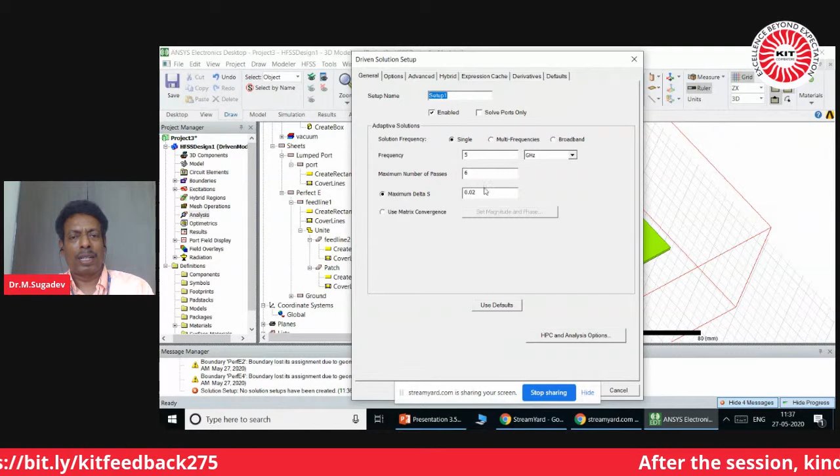So frequency, this frequency should be the center frequency of your design. Our design is for single frequency, right? So we can give 3.5 gigahertz, maximum number of passes, you can give 10. Delta S is 0.02. These inputs are related to the FEM solver. These are standard values you can keep, but frequency depends upon your design. Okay, done. Then you give okay. So this is done.

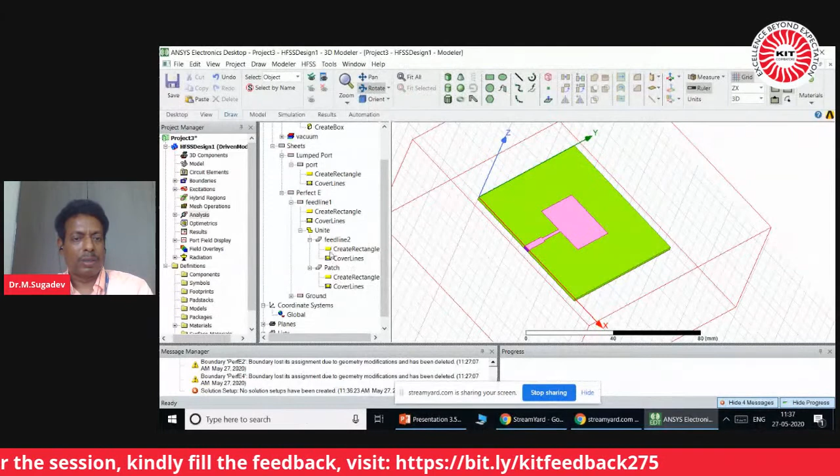Okay, then once again we click on this analysis. You'll get another option now, setup. You right click on that. You'll get add frequency sweep. So setup we have created, and then right click the setup. You will see the option add frequency sweep.

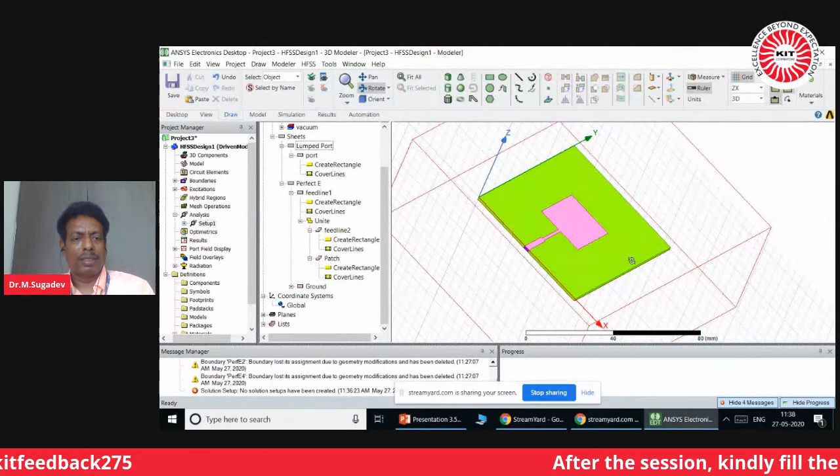Here we tell about the range, 1 to 5 GHz. I am interested in 1 to 5. I want to analyze the antenna from 1 GHz to 5. You can give 20 GHz or 10, up to your requirement, right? And then just give OK here. That's all. Once again you go to validation check and see that you have done everything. Now analysis setup is also done. We have told what frequency the software should analyze, what's the range it has to analyze.

All this done now. Now we have to run the software, right? So we have to tell the software to do all the analysis. So go to HFSS, click on analyze all. Okay. So I'll save this as web3ghz. Okay. I've saved my design and it is going to analyze.

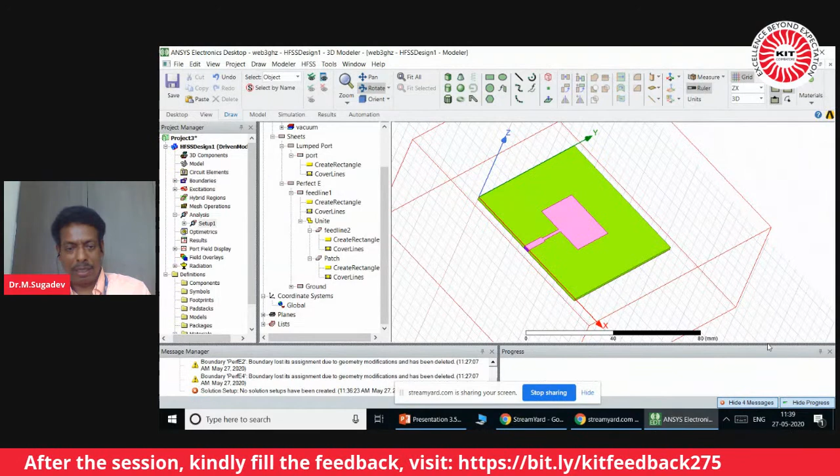So when the software is running, it will take some time depending on the computing capability of your machine. It could be 5 minutes, 10 minutes, or even 20 minutes, half an hour. Memory and all that decides how much time it takes. Now it will be over within 10 minutes. Till then, I'll just show you in the presentation, I'll just recollect what we have done.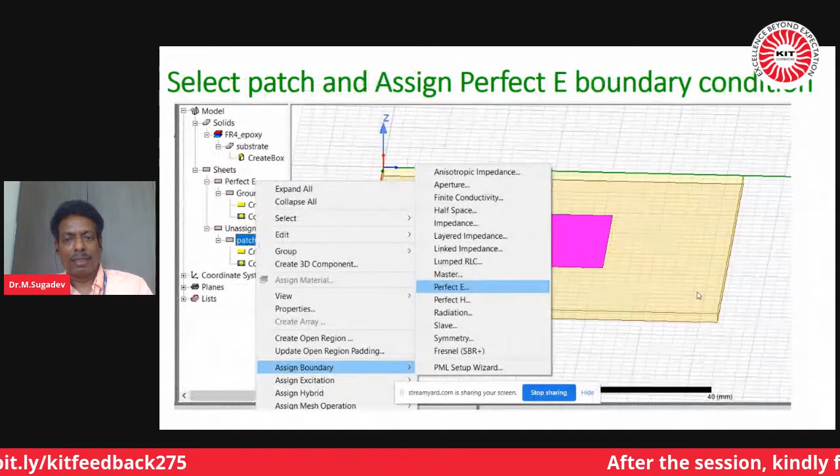We arrived at the specification from the starting point. Then we created the substrate, and we then made the ground layer. We entered the dimension for the ground layer. Then we made the patch, and then in the first design, I have just put a single feed line of same uniform width, 2.98, what we have designed. And you could see the other things are the same.

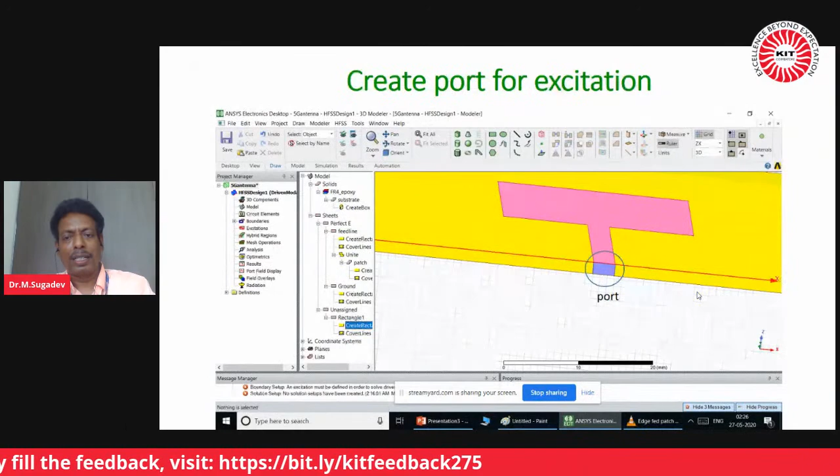We have declared all the copper patches as perfect E. We have edited that. We declared the port, and then we created the port. We created the air box, and then we did the analysis.

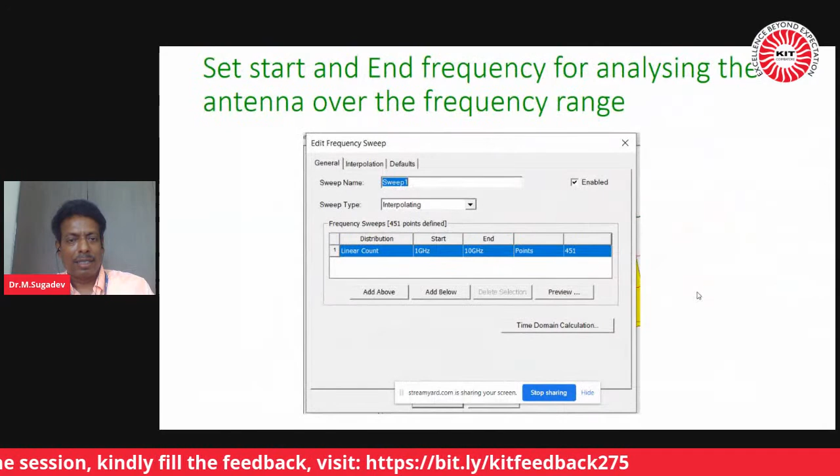Okay, sweep, everything is done. And after analysis, you could see the result. Actually, we have designed the antenna for 3.5, but this antenna has a higher return loss, at -5. So the antenna should have a minimum of -10 dB of return loss. Then only can we say the antenna operates at that frequency.

Instead, the operation goes at a higher frequency, right? So it's working, actually. It's -5, but it's not perfectly working, you could say. It's not practically acceptable. It should come down to -10 dB. This happens because of the impedance mismatch, because you have taken a straight feed line, right? You have taken a feed line of uniform width, and due to that, there was a mismatch between the patch and this feed. So you had a difference in the performance.

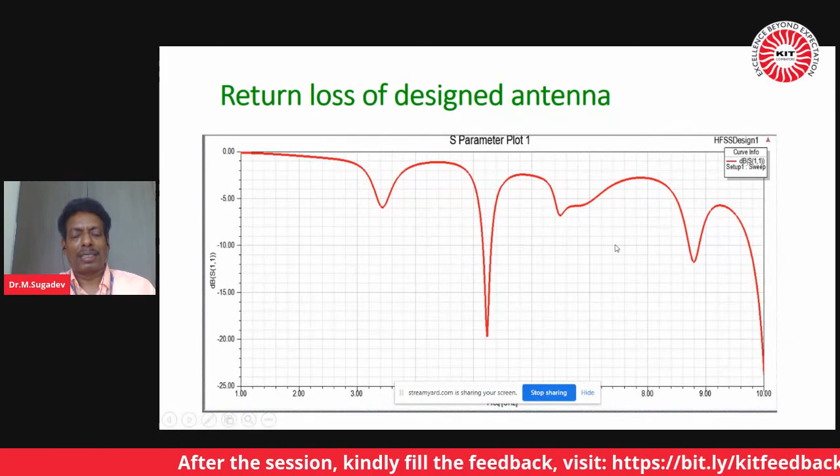So one thing we can do is change the patch dimension to bring this resonance to 3.5, or you can work on the matching technique, right? To avoid this, we have done that reduction in feed line width, so that you could see how the result would be. And this is the radiation. The radiation pattern was fine, the ideal pattern of a patch, with the straight line feed. The only thing is the return loss at the frequency of interest.

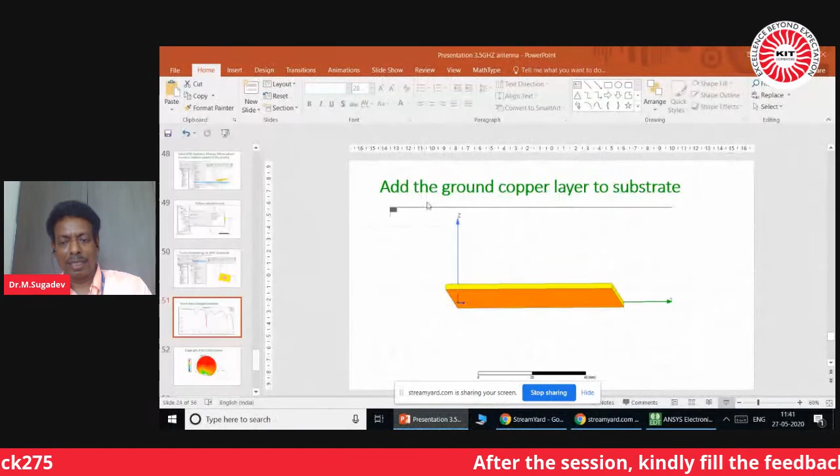Okay, so I think it's run. Once the simulation is over, you could see normal completion of simulation on server. So without any errors, the frequency sweep has converged, right? So now we could see the results. I'll go to HFSS. To see the result: HFSS, fields, results. You can go straight away. Then create modal solution data report, rectangular plot. This is to see the return loss.

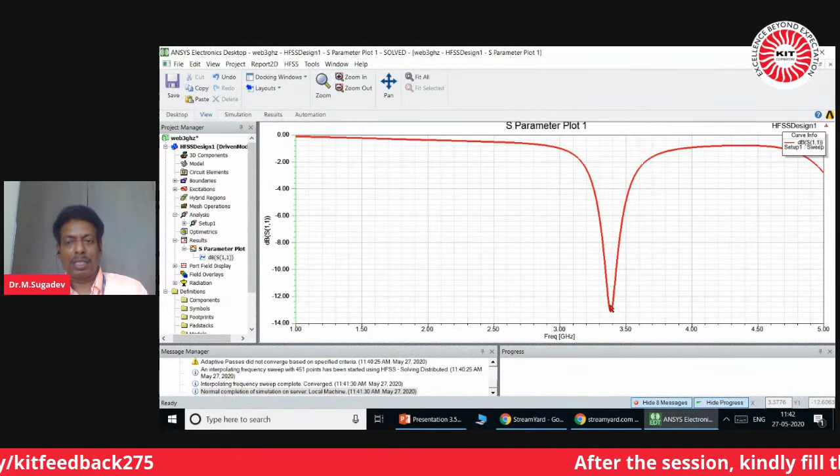That's the S parameter. S11 is nothing but the return loss, the ratio of the reflected power to the input power at the desired port, and we'll get it. Okay, new report. I'll close. Now you could see with the straight uniform width, it was somewhere around 5. But now it comes around 3.5, the desired frequency range. You can further optimize this slightly.

Actually, I have taken some approximate calculations. If you could take up to 3 digits after the decimal point for all the calculations, then we can get it exactly. That's not a problem. As I told, the main reason for this small drift is that the feed line is not exactly lambda by 4, because lambda by 4 itself is 21.42, but I have taken the total length of the feed as 21. So if I work on that, I can easily make it 3.5.

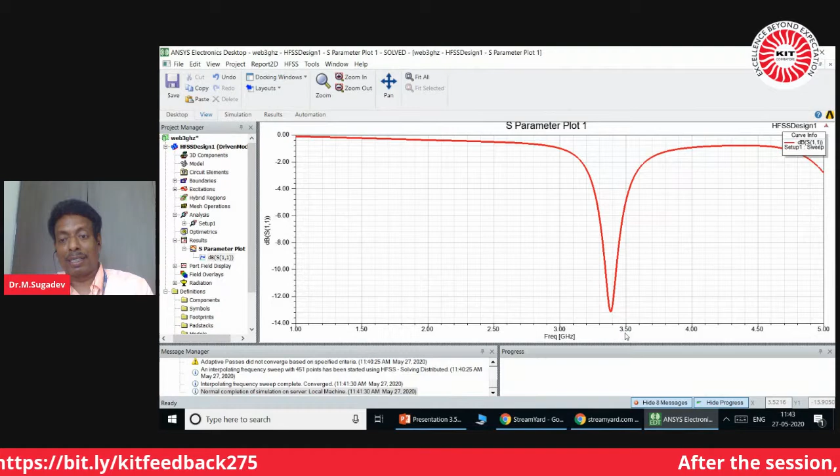So we always do some small optimization to bring it to the desired value. You have two options: you change the feed line, or you make small changes in the patch width or length and bring it exactly to 3.5 GHz. And then you could see the radiation pattern also. So as per our design, the antenna works well.

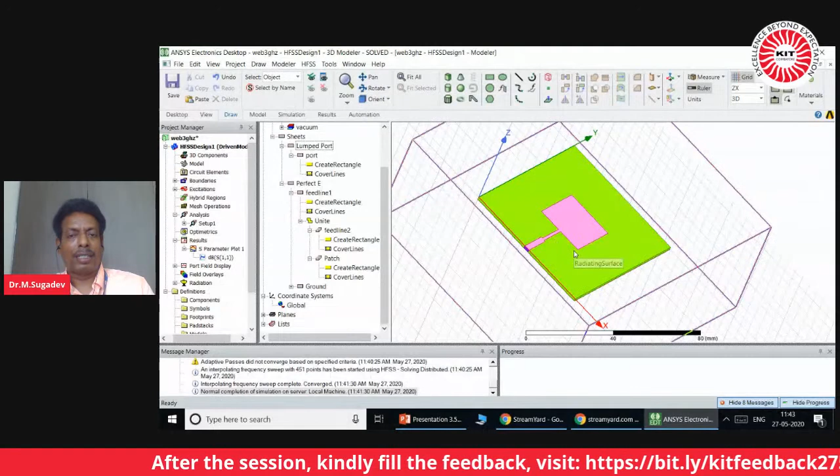If you want to see the radiation pattern, go to radiation, insert far field infinite sphere, and you can make it 0 to 360. Engineer Vinod will explain this radiation pattern further. It's done. Once again, I'll just give analyze all to see the radiation pattern. Okay, it's over. It is now analyzing the radiation patterns. I'll go to radiation results.

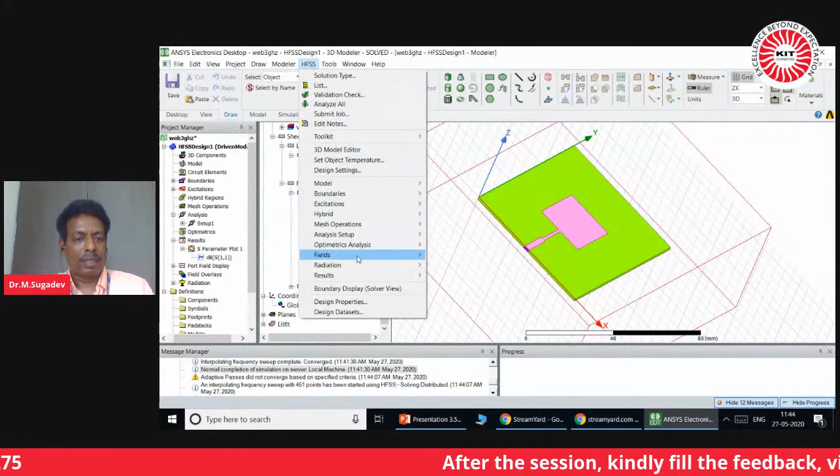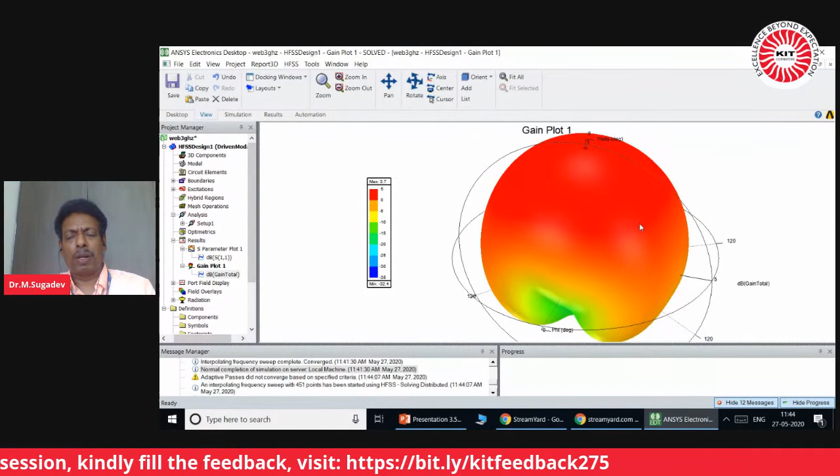Far field report, 3D polar plot. I want to see the gain of the antenna in dB. Okay. So I want to plot the gain in decibels. You get a new report, and you could see the ideal radiation pattern. And here you could see the maximum gain of the antenna is 3.7 dBi. So if the gain is positive, the antenna is well and good and suitable for applications.

Okay, right. So we have made the design, and the simulation comes close to it. A little bit of optimization can bring it exactly to 3.5. Next, if you want to increase the bandwidth, you can try changing the substrate material to one with a different dielectric constant, and you can make some changes in the patch shape to acquire the desired bandwidth.

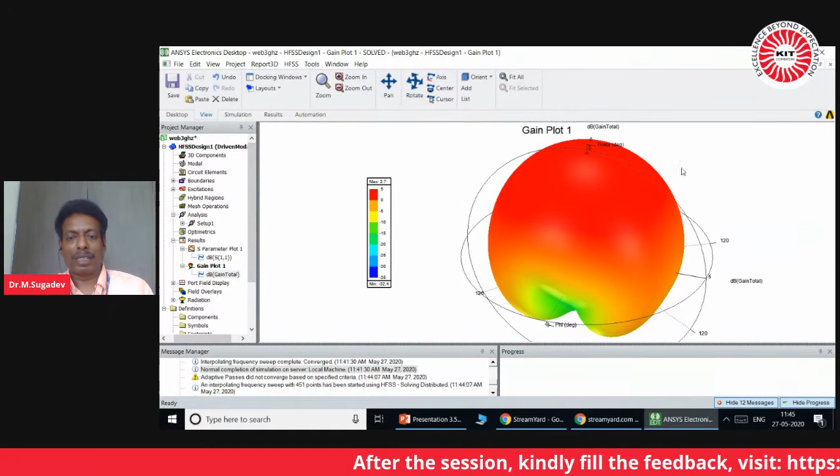Okay. Further analysis and optimization of this same design will be done by Mr. Vinod. I'll hand over the session to engineer Vinod to further demonstrate the analysis of this proposed design.

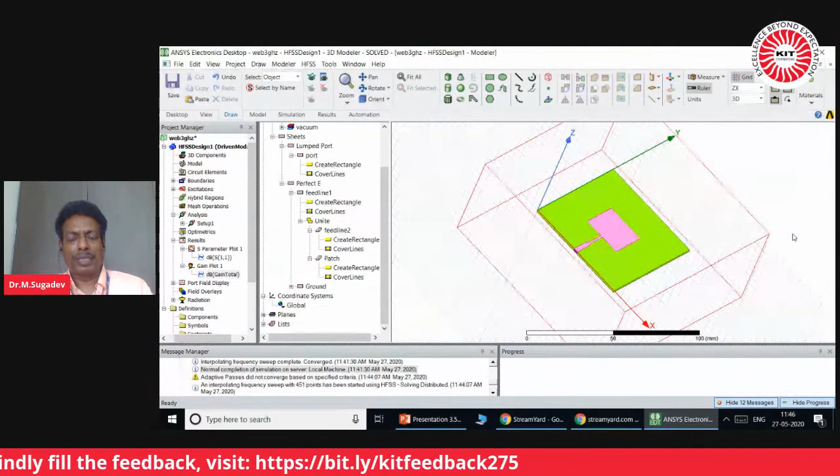So as you have seen, once you know these basic steps, you can design for any frequency, any shape you can draw, because you have the different shapes, library packages. You can simply select the shape you want and you can make it. You have option to etch away metal patches, so you can introduce slots. Anything can be done with this 3D tool actually. So it's just a matter of proficiency in the tool to design antennas at a fast pace actually.

Okay. I hope this demo will be useful. And any queries you have, you can ask.

I'll hand over the session to Mr. Vinod. Sir, Vinod sir, are you online? Yes, sir. I'm on. Sir? Thank you, sir. Hello. You have the design file, right? No, sir. I'll just explain in a theoretical manner. No problem. Okay, sir. Thank you. And good afternoon to all. Sorry, good morning to all.